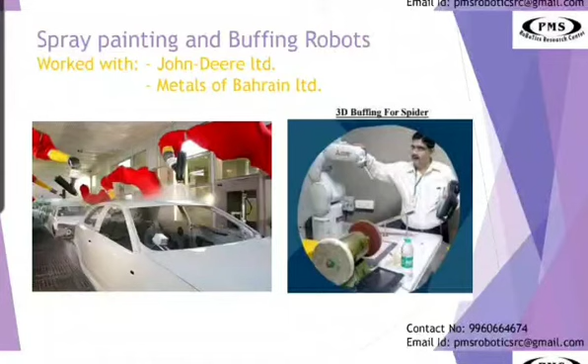Good afternoon. The next point is robotic spot welding.

So it reduces cycle time by 20% with greater spot control. So what is spot welding? It is a resistance welding process which uses a large electrical current to join two or more sheets of metal in a single location.

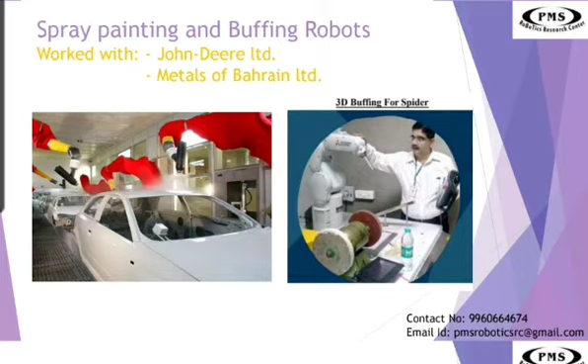So the principle of spot welding is that spot welding, which is also known as resistance spot welding, is a resistance welding process. This welding process is used primarily for welding two or more metal sheets together by applying pressure and heat from an electric current to the weld area. So this is the working principle of spot welding.

Spot welding can also be difficult due to various factors. The main ones include using galvanized steel and aluminum. These materials require a high current level to weld and a longer welding time, unlike welding steel. Another factor is the inappropriate thickness of the welding material. So only thin metal can be welded accurately and efficiently. Installation cost is more. So these are the limitations of spot welding.

In the spot welding process, spot welding is basically divided into four phases: heating, melting, melt flow dynamics, and then cooling. So depending on the intensity, evaporation of the material may occur.

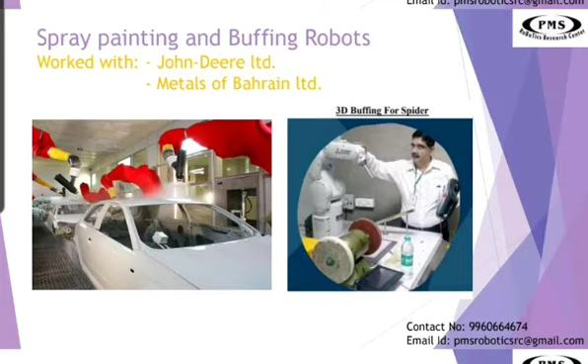So this is all about the spray painting robot.

So next, assembly operation, we have already seen that. So how are the robots assembled? The robots are assembled using a substantial amount of purchased components such as electric motors, hydraulic cylinders, bearings, wiring, controllers and other important parts.

So assembly robots are used for lean industrial processes, and they have expanded production capabilities in the manufacturing world. An assembly line robot can dramatically increase production speed and consistency, and they can also save workers from tedious and dull assembly line jobs.

So next point is robotic vision system. A robot vision system consists of one or more cameras, special purpose lighting, software and a robot or robots.

So what is the use of camera? The camera takes a picture of the working area or the object the robot will grip, and software searches the image for the features that let it determine the position and orientation. So this intelligent robot vision generates information that is sent to the robot controller and program positions are updated.

So depending on the application, the camera might be mounted on the robot or it could be in a fixed position within the same cell. So calibration is usually needed to relate the vision system coordinate space to the robot. The robot companies often offer a vision guided robotic system with vision software tightly integrated with the robot controller,

So next point is robot image representation. So the process of extracting, characterizing, and interpreting the information from the image.

So image processing in robotics means the cameras are essential in the robot, as we have already seen, such as in self-driving cars that are required to identify objects in the environment. So sensors in the camera return an array of pixels to which the image processing algorithms are applied. So the first step is to enhance the image, to reduce the noise and improve the contrast.

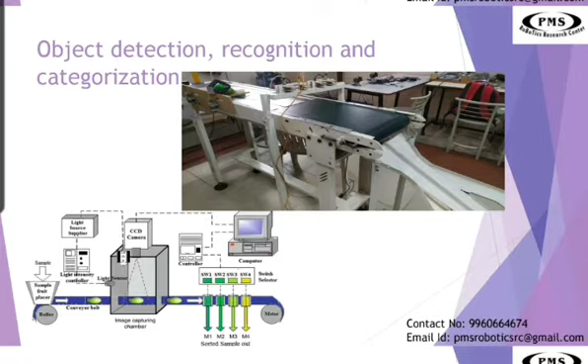So the next point, pick and place robot. We have already seen this point, pick and place robot.

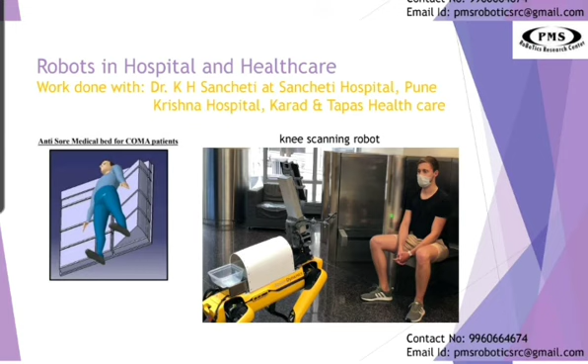So the next point is the industrial applications of robots in material handling and assembly. So a robot is a machine, especially one programmable by a computer, capable of carrying out tasks. So this application point we will continue. The pick and place we have already seen.